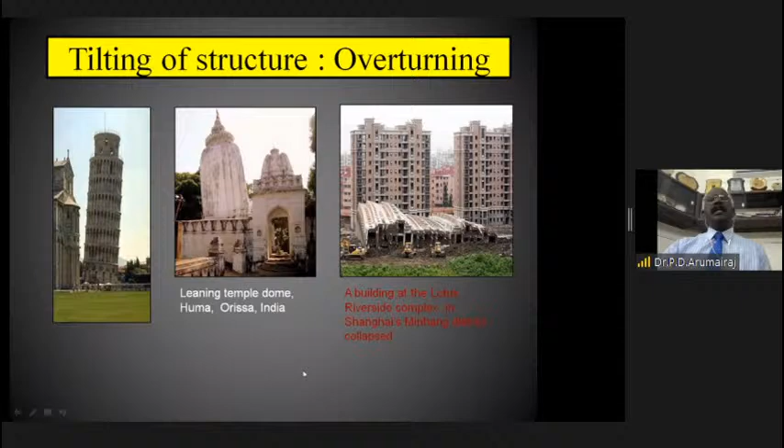So I will just have a quick passing through of these slides.

This is a new terminology you may probably come across, probably in the metro context.

Excuse me, but there have been cross talks also.

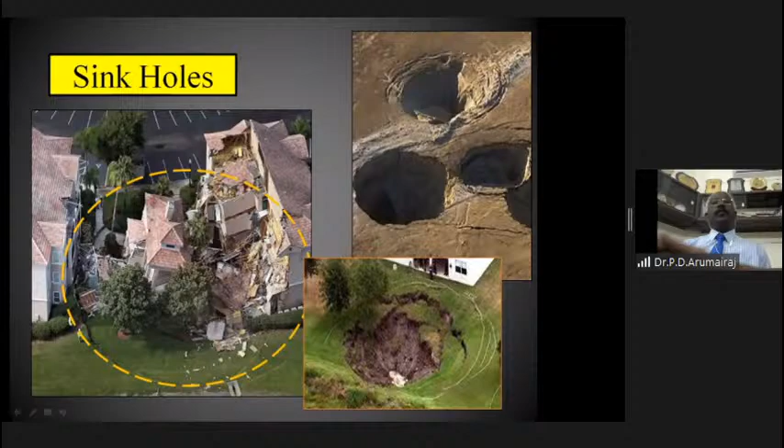So sinkholes, which were not heard of earlier, now in the nearby areas of Cochin and Chennai where metro projects are being implemented, at times we come across a sinkhole formed in the road, or a sinkhole formed along the line that was executed. So these are certain things we should know, and how these sinkholes are formed.

Next, just have a look - these are only to show you some pictures, to see why an investigation and how the evaluation of bearing capacity should help us. That is the thing. Next.

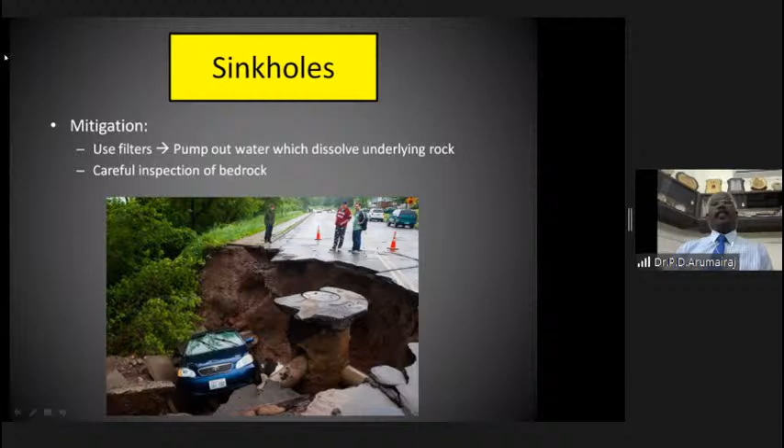These are all some failures, you know. Yes, next. Then frost heave.

When I studied these subjects as a student, I used to wonder whether we would really execute all these things, whether they were relevant to our education. But now, as a teacher, engineer, and consultant, I find that every line you study in your subject appears in the practical field. Normally we ignore or omit certain portions, but anything given in your syllabus now, in almost all universities and colleges, is recast to be field-oriented. What is needed in the field is included in the syllabus. So every student should concentrate on every part of it, and I am sure it will have application in the field as well.

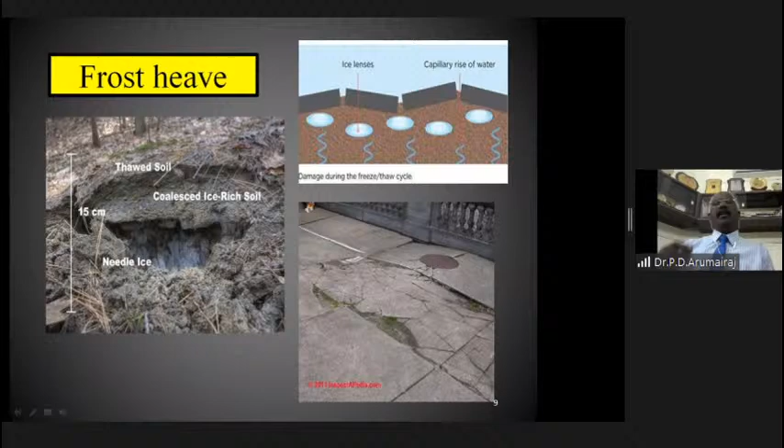Next. This is again some failures I'm showing: sand boiling, ground cracking, and ground heaving.

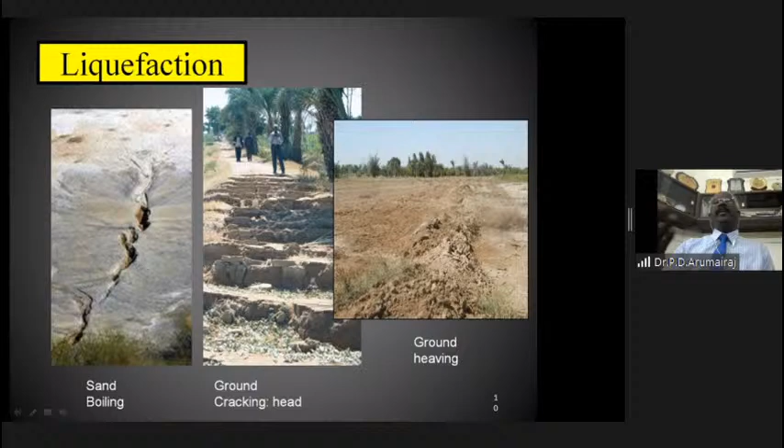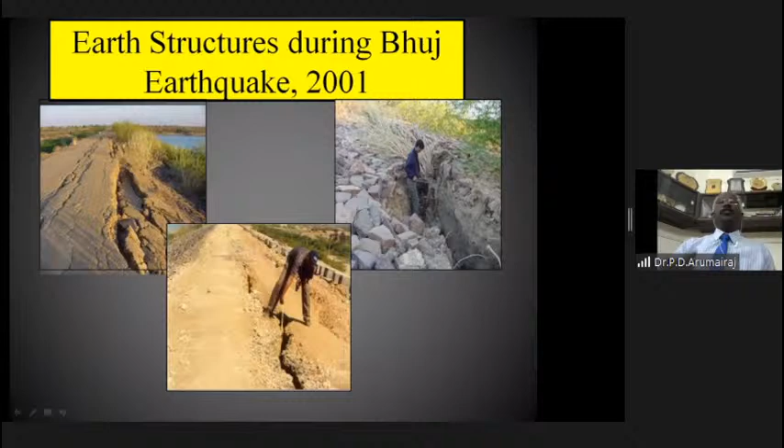And you see an overturned apartment complex. Even today we saw in the newspaper that a building had collapsed in Mumbai, and we don't know how many lives were lost. This is from the Bhuj earthquake I was referring to; in the next picture you can see a few buildings.

So I showed some of these pictures just to show that there are failures in buildings. And in fact, as a geotechnical expert, I should thank the failure of buildings. I shouldn't really say thank, but only after building failures have people started realizing the importance of geotechnical engineering and the importance of the foundation.

Here there is a small projection where you can see the load path of the building. At the roof, there may be some live load and dead load. Let's look at how the load transfer takes place. From the top, the load is transferred to the beams, the roof beams, as shown by the arrows. We take a lot of care in designing the beams too — it can be a singly reinforced beam, doubly reinforced beam, a pre-stressed concrete beam, or maybe a steel section — because it has to carry the load coming over the roof, including the roof slab.

Then the load is transferred to the columns. We are again careful in designing the columns — it should not be a long column, it should be properly reinforced, and the size should be correct. According to the codes, you cannot have a 9-inch by 9-inch column; the minimum lateral dimension should be 1 foot. We are careful in so many aspects of column design because we know it has to support the loads coming over it. Then the load is transferred to the foundation.

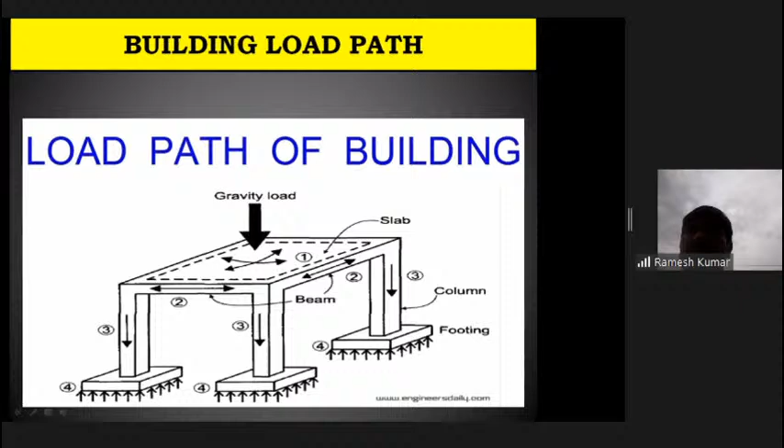I was a professor, as introduced, but during the course of my profession, I was involved in a lot of consultancy projects. Many designers used to come to us with doubts about the design of foundations.

So I used to ask them, now you have been a leading designer, designing wonderful structures. When it comes to foundations, why are you not spending time to refer and solve it yourself?

Out of interest I used to ask them, and they said, sir, soil mechanics and foundations, right from our BTech studies, was a gray area. So we thought we'll leave that gray area as it is, and we are still considering it a gray area, keeping it like that.

But I am sure, not just because I got interested in geotechnical engineering, that geotechnical engineering or soil mechanics and foundations is really an interesting field, because you are dealing with a lot of uncertainties and challenges.

See, if you want to design a building, if I'm sitting in my room and given the plan and all the details that are needed, I need not even move out of my room. I can do the design and send it.

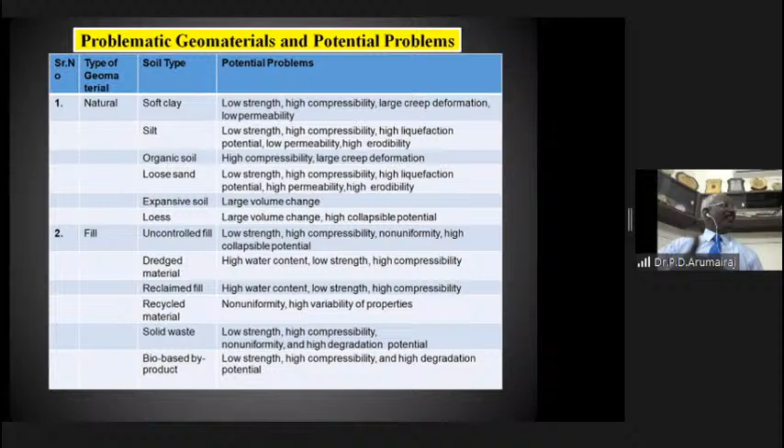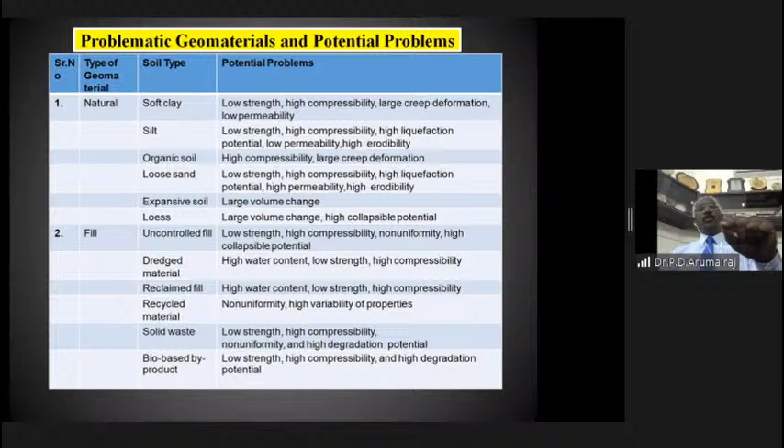So friends, I have taken so much time to give an introduction. If I spend time on the introduction, you should be able to think and develop an interest towards this subject and topic, and once you develop interest, you can understand what it is. Normally a lecture shouldn't go beyond 20 minutes, but we've already gone nearly 40 to 45 minutes. There is no other way since we have to do everything online. Why 20 minutes? Because the mind can concentrate only up to that time. Still, we are compelled to go beyond that limit, because in a webinar we must spend more time explaining these topics.

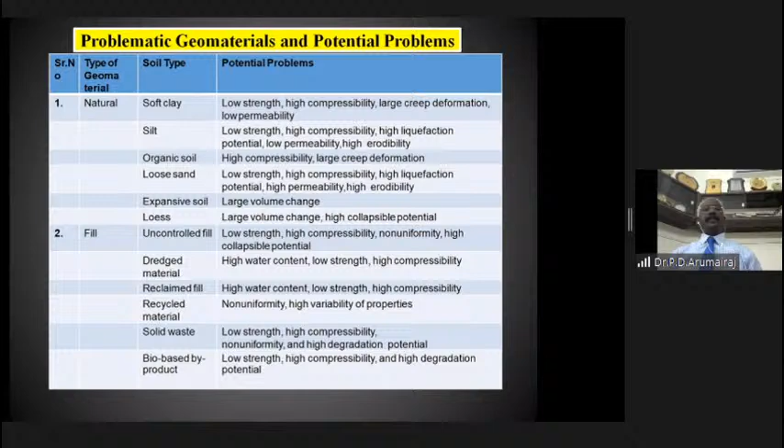Now, the first question is, what is safe bearing capacity?

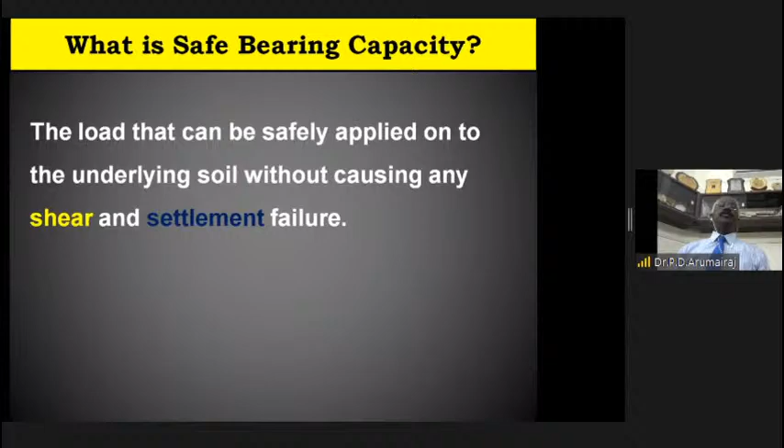So here I have highlighted two points: one is shear failure, another is settlement failure. The safe application is governed by shear failure and settlement failure. Now you may ask me, sir, what is a shear failure? We'll see that.

So what is a shear failure? You can understand what shearing is. We have seen it in stresses: tensile failure, compression failure, shear failure. You can just see shearing. So this shearing is taking place below the foundation in the soil.

There are three types. One more thing I want to stress here: in all other building materials, whether cement, concrete, tile, or brick, codes are definite, and whatever is specified can be followed 100%. Whereas in soil, codes are meant only to give guidelines. They can only guide you, telling you to do this or that. You may deviate from that, either to reduce the value or to increase it. That's why I quoted the basics.

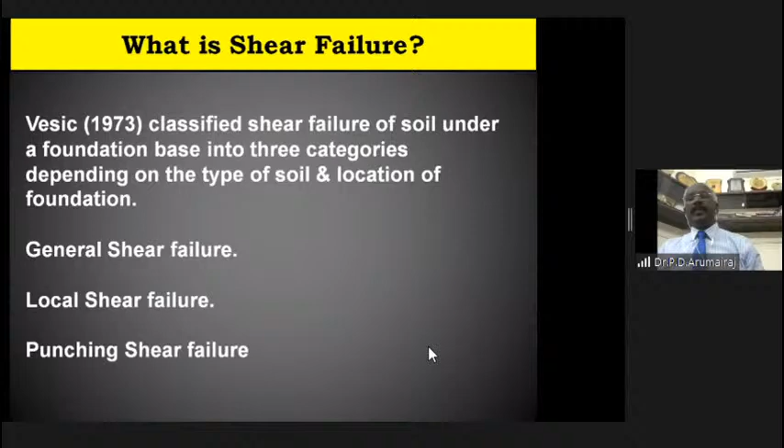General shear failure, local shear failure, and punching shear — there are three types of failures. In the definition we had given, shear and settlement, so I am just concentrating on the shear. I have put three conditions: general shear failure, local shear failure, and punching shear. What is general shear failure?

Suppose I have just put Q ultimate. That is the footing, imagine that to be the footing. Like a step, you can see it. It is for a strip footing, and it looks like that.

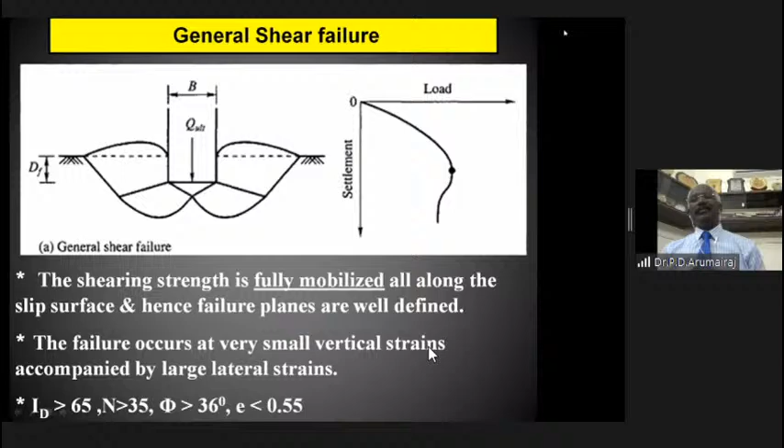Phi and C are the shear strength parameters. So we need to check what the phi value is.

We can understand if it is a soil which has got a phi value less than 30, there is a local shear failure. In what way does it help? I told you in the previous case, the shear strength is fully mobilized.

In local shear failure, only two-thirds is mobilized. By the time two-thirds is mobilized, it fails.

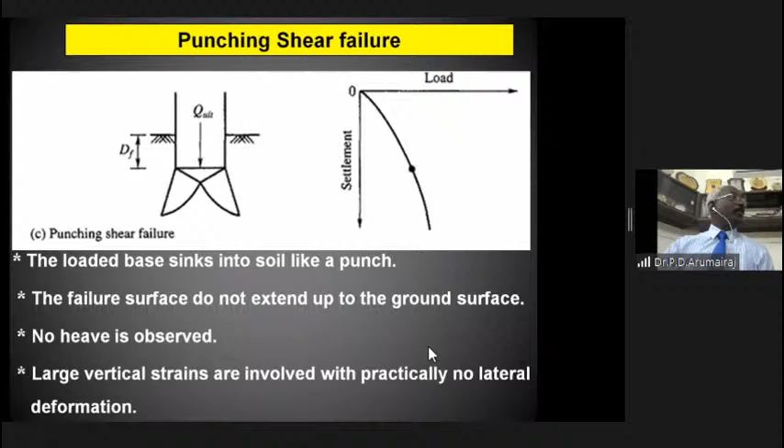Then next is our settlement. Going back to this settlement failure, highlighted in blue color - what is that settlement failure? Is it only about shear failure, or something else too? Why is settlement failure also to be considered? By definition, settlement is the downward movement of the ground caused by load displacing the soil.

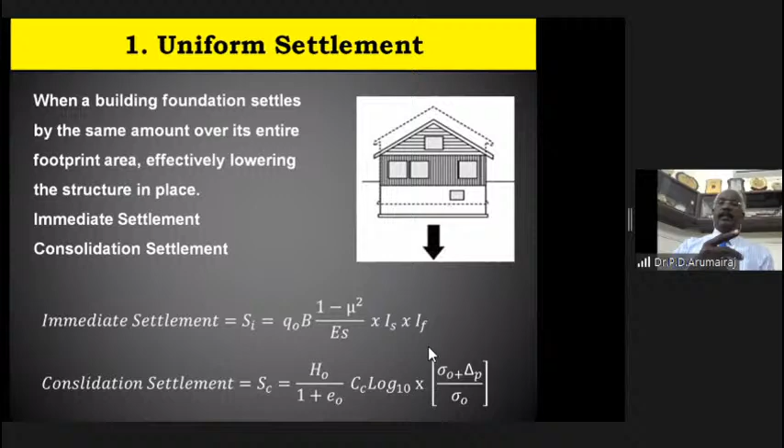So we have to calculate these two settlements separately, then add them together, and you should not exceed a particular value of settlement.

And suppose in the next slide you see immediate settlements - how do we calculate the immediate settlements?

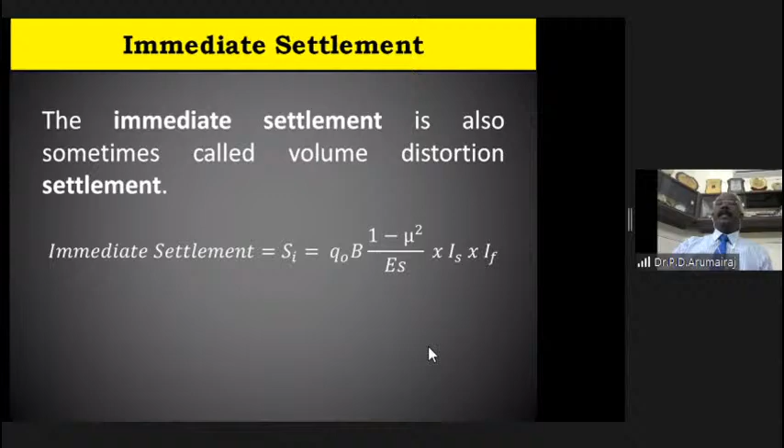So this settlement can be calculated. This is for the purpose of the students - they can see how the immediate settlement can be calculated.

The second settlement is consolidation settlement, and it is a time-dependent settlement. In the consolidation settlement, you can see S suffix C, settlement due to consolidation is equal to H naught divided by 1 plus E naught, times CC log to the base 10 of sigma 0 dash plus delta sigma divided by sigma 0.

This will occur in the case of clay soil, and this consolidation settlement will occur over a period of years. It doesn't complete today or tomorrow - every year it keeps settling.

How do we find this consolidation settlement? There is a calculation here, where E naught is your void ratio, H naught is the thickness of the sample, and we have to conduct a consolidation test in the laboratory.

Consolidation test in the laboratory - that's what I mentioned in the beginning. If testing soil for moisture content takes about 24 hours, the consolidation settlement test takes about 3 to 4 days, depending on the loading conditions. How many people actually do the consolidation test?

I do not. But in the case of clay soils, the consolidation settlement has to be determined, based on which your bearing capacity value can be given. I have just mentioned to you, we can give 30 ton per square meter, or 40 ton per square meter, or 20 ton per square meter, and it is in one way based on some arithmetic calculations, or based on some field tests.

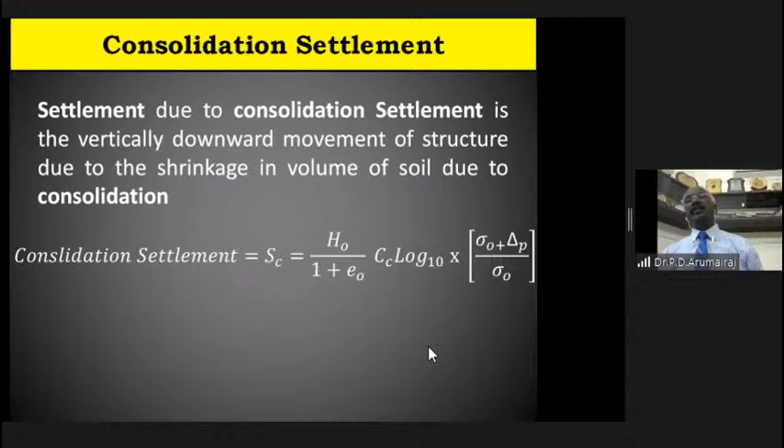But this consolidation test will give us the confidence to give the correct value of bearing capacity, safe bearing capacity. That is very, very important. Simple calculation is not correct. That arithmetical calculation combined with this consolidation settlement, particularly in the case of clay soil, is very, very important before we come to the conclusion on the clay soil.

SBC - so the consolidation settlement has two types: one is primary consolidation settlement, the other is secondary consolidation settlement.

Primary consolidation settlement can be determined from the consolidation test, whereas secondary consolidation settlement cannot be determined easily, and it occurs for 5 years, 6 years also. Normally this secondary consolidation can be ignored, so please just forget about it.

So in the case of primary consolidation settlement, what happens? For soil to settle down, the void should be reduced - that is the gap between the soil particles or soil solids, that is voids. The settlement is possible under two situations, because the voids contain two components: one is air, another one is water.

Sometimes voids are filled with air completely. Then we call that soil a dry soil. If it is a dry soil, the voids are filled with only air.

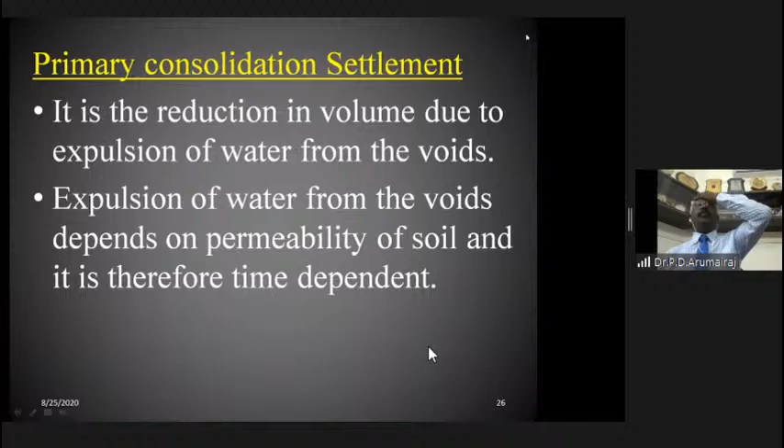Ground improvement techniques - previously I used to ask, if I want M60 grade concrete, I can immediately make it. But can we make soil of M60 grade? With the advancement in ground improvement techniques, we can say it is possible. The existing ground, existing soil, can be improved upon by these techniques, even to take care of 60 tons per square meter.

So please remember, I concentrated on two factors: one is shear, another one is settlement. That is why I have gone deep into these two aspects, because we should know how the bearing capacity is calculated, how it is evaluated.

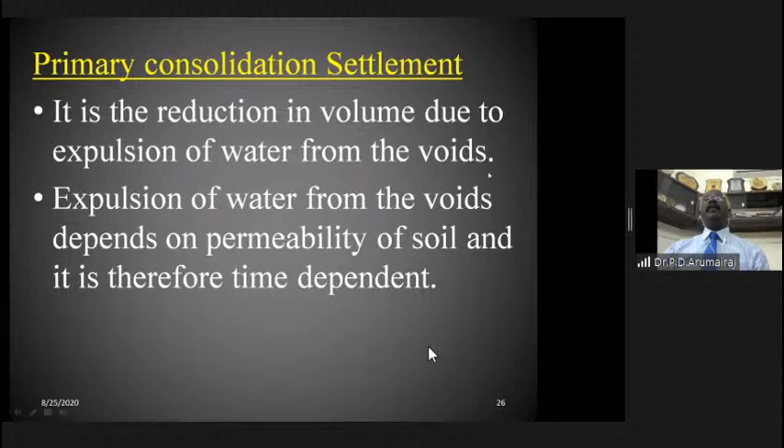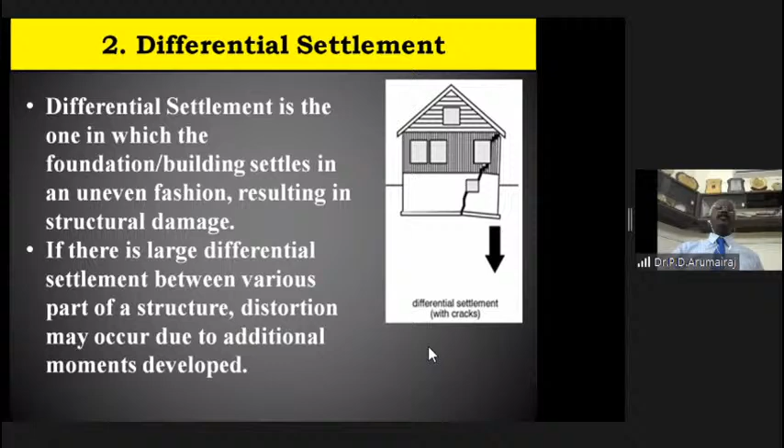Every structure is designed for a limiting settlement, a tolerable settlement. For an isolated footing on sand, the tolerable settlement is 25 millimeters. For the same isolated footing on clay soil, it is 40 millimeters. If it is a combined footing, the permissible settlement on sand is 40 millimeters, same on clay it is 65 millimeters. And if it is a raft foundation, on sand it will be 65 millimeters, on clay 100 millimeters.

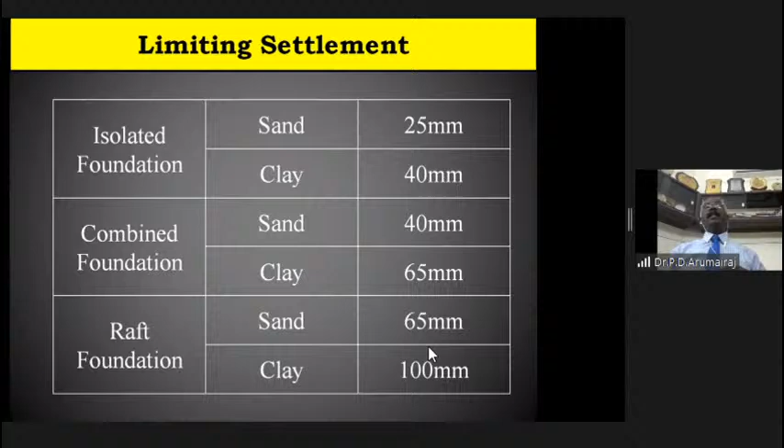So we design the building, we evaluate the bearing capacity, taking these values into consideration - for raft we have a permissible settlement of so much, for isolated footing we have a permissible settlement of so much. And if you exceed this uniform settlement, that may lead to differential settlement in buildings. That is what we need to remember.

So these are all some of the things - uniform settlement, building tipping settlement, differential settlement, every crack goes for this. See how walls are cracked, there are a lot of projections.

So for the bearing capacity, I have a definition where two aspects are stressed: one is the shear failure, another one is the settlement failure. So that you need to remember.

Your bearing capacity - in the field there are methods: standard penetration test, dynamic cone penetration test, plate load test. And there are analytical methods. There are many more methods also available, but I am not bringing them here because I want to keep it at the preliminary level and not go beyond that at this stage.

Standard penetration test is very common and it is universally accepted all over the world. The output of the standard penetration test is simply denoted as capital N, the SPT N value. In the country, if the N value of the soil is known, people can easily understand the property and condition of the soil. So next one is the dynamic cone penetration test.

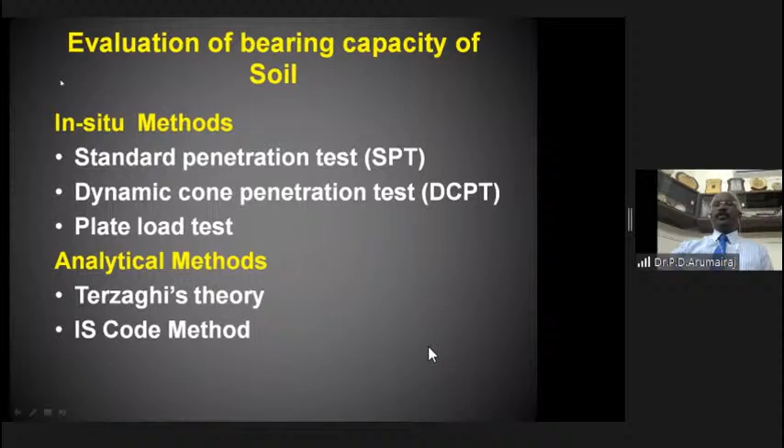So in the standard penetration test, brother, we just make a pit. This is a simple test, and probably the cost for this test is considered to be minimum, that's what I can say. Depending on the situation, if it is a small building and if you thoroughly know about the substratum of soil, we can go for the standard penetration test, for which we make a pit.

Normally, we make a pit of 1.5 meter by 1.5 meter up to the desired level of foundation, whatever level we think the foundation should be placed at, we can dig up to that level.

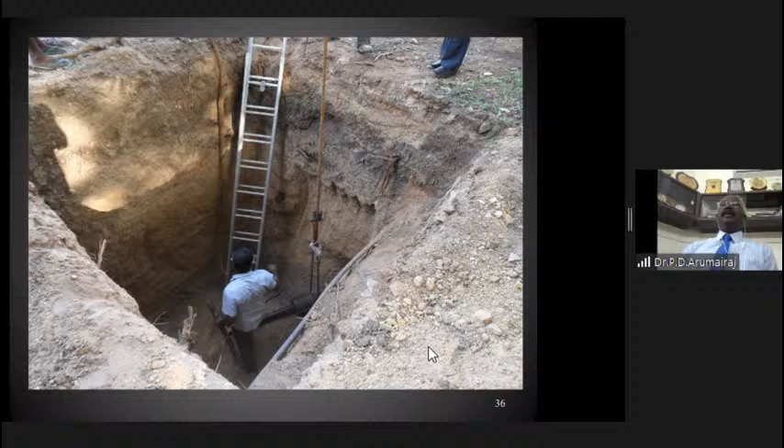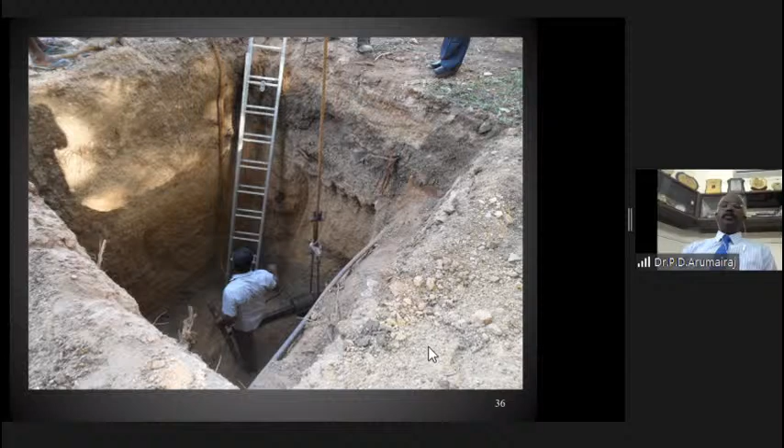There is a standard sampler as specified in the IS code, and even the British code has the same dimensions, and so does the American code. That is why the N value is standard throughout. That's why I told you.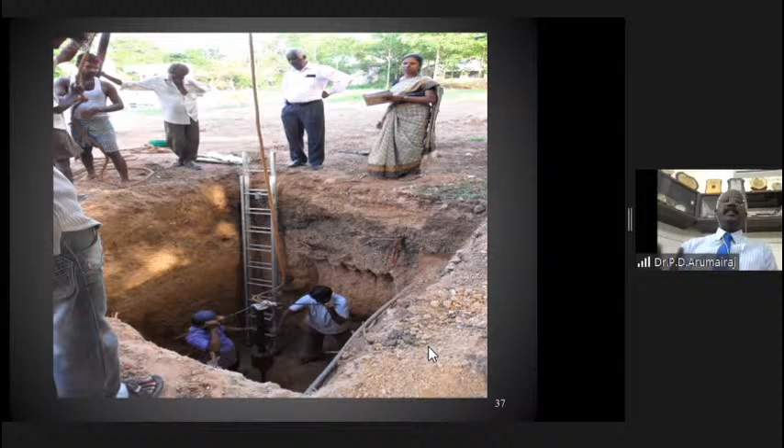Now you see here how the test is conducted. Just to see the test setup: at the bottom, the larger diameter is your weight. Through this pulley and rope, this weight will be lifted, and all of a sudden, it will be dropped.

You should not slowly drop it, you should withdraw your hand suddenly, so it will be dropped. It will apply a blow onto the head, and the head will drive the split spoon sampler. I am yet to show you the split spoon sampler.

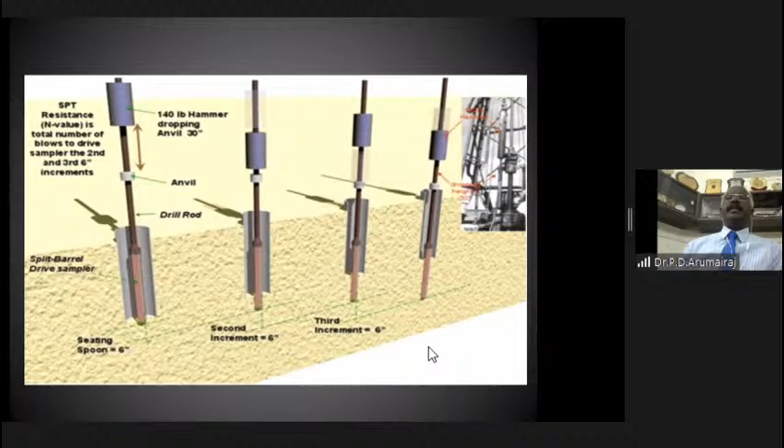We observe the number of blows needed for the penetration of the sampler for 15 centimeters, the 6 inches, that is 15 centimeters. Similarly, for 3 such 15-centimeter intervals, the number of blows required for each 15 centimeters is recorded three times: first 15, second 15, third 15. We consider the first 15 as a seating drive.

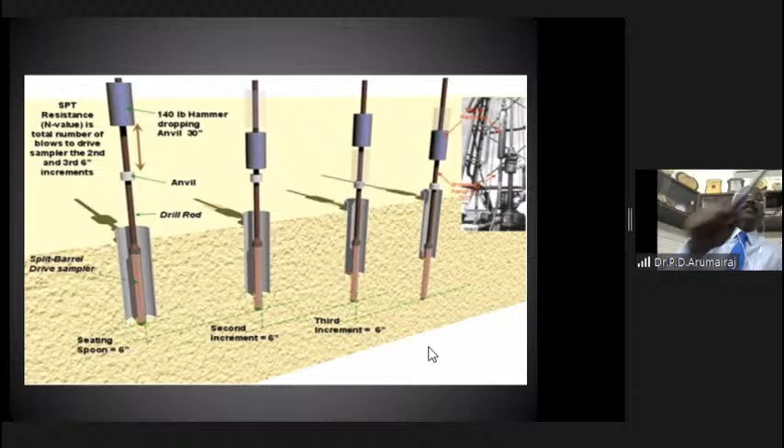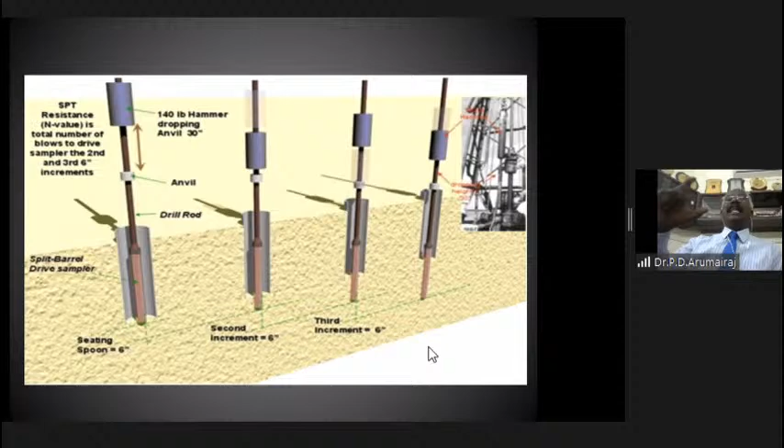Normally we excavate the pit, and it may be open to atmospheric conditions and weathering, so initially it is called a seating drive. So when that is the seating drive, what is the N value, the SPT N value? The SPT N value is nothing but the number of blows required for the penetration of the last two 15-centimeter intervals.

First 15 centimeter seating drive, ignore these blows. For second, it is 10. For the third, it is 22. Now the N value is 32. And this is an observed N value.

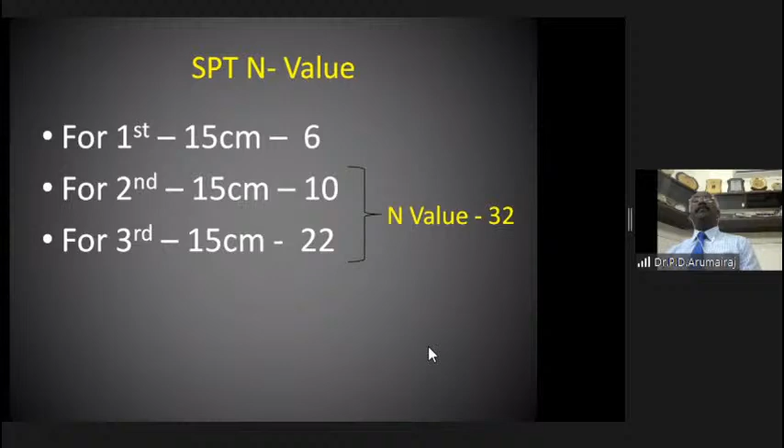And for this N value, there are corrections in the field. The first correction is dilatancy correction. Dilatancy correction will be applied when we conduct the test in a saturated silty sand. See, every terminology has a meaning.

Saturated - just now I told you what is meant by saturated. All voids are filled with water. So when it is saturated, the water present in the voids is called pore water. This pore water will offer some resistance to the penetration of the blows, so there will be an apparent increase in the number of blows.

So the number of blows observed is more than the actual blows needed, because of the saturation of the soil. So when it exceeds, the observed N value is greater than 15. In our case, the observed N value is 32. Now it is greater than 15. Now I have to apply a dilatancy correction.

What is the dilatancy correction? 15 plus 0.5 into N dash minus 15. We had observed it as 32. So 15 plus 0.5 into 32 minus 15.

So 32 minus 15 is 17. Half of 17 is 8.5, or you can take it as 8. So 15 plus 8 is 23. This 23 is the corrected SPT N value. Observed SPT N value is 32, that is now corrected to 23. Just imagine.

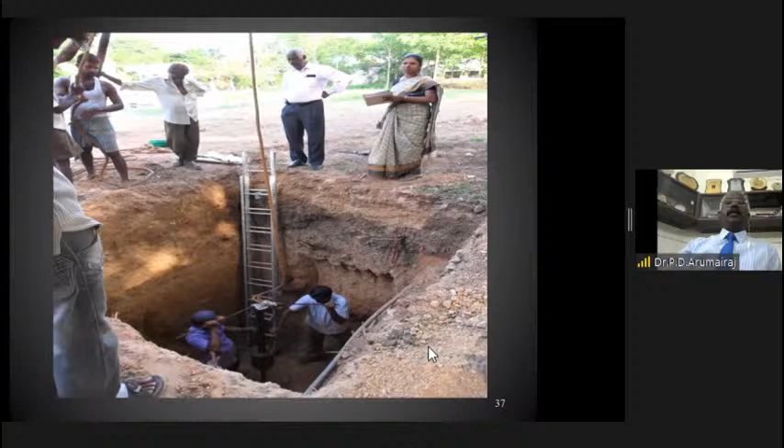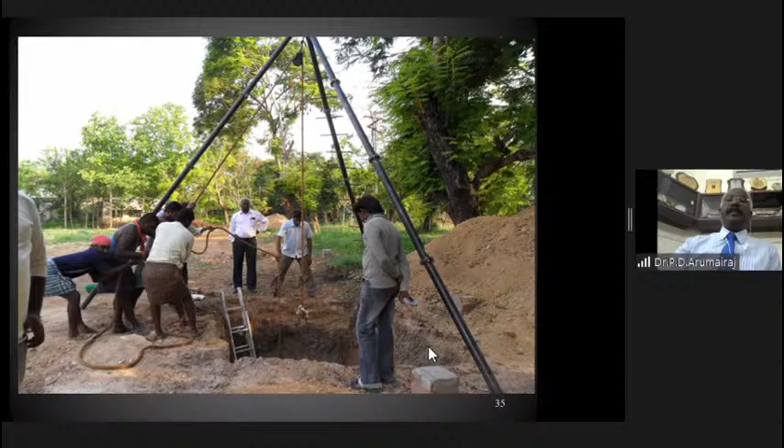What is an overburden correction? Just if you go to that pit - see, we conduct this test in a pit, the open pit. So before the pit was excavated - just imagine, this is the pit - we removed the overburden above the bottom of the pit.

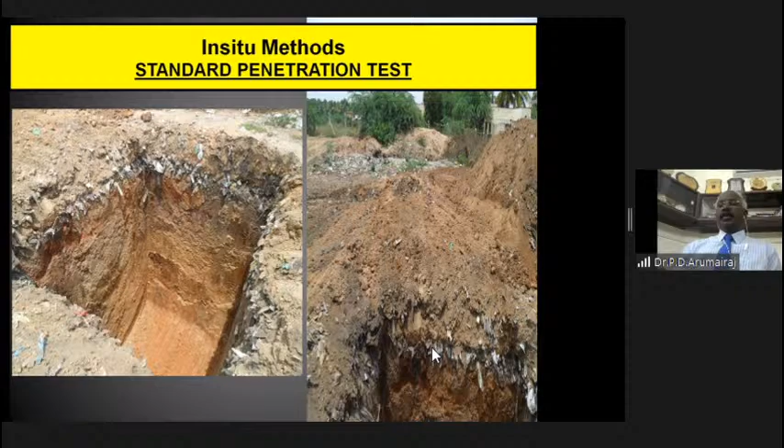As a result, now this split spoon sampler can easily penetrate into the soil, or the penetration value is underestimated. We don't remove the soil anywhere. If you now drive the split spoon sampler without removing any soil, there will be an overburden pressure. That surcharge will make the bottom of the pit still compact, and the split spoon sampler will not go easily. Since the surcharge or overburden is removed, we apply the overburden correction.

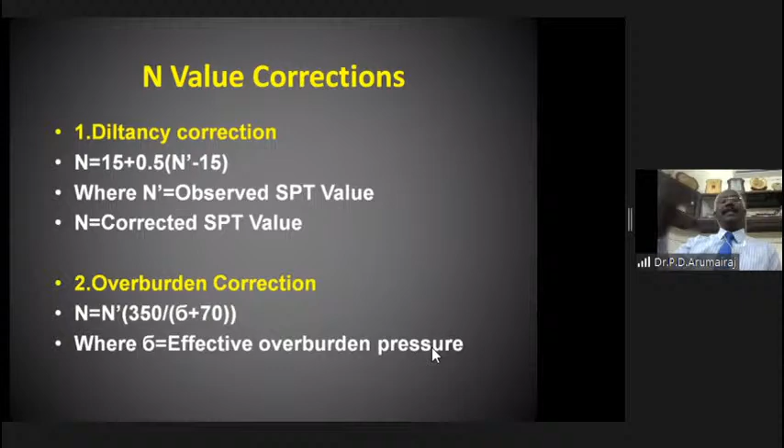So after this correction is also applied, here N dash is the observed N value, 350 divided by sigma dash - sigma dash is nothing but the effective overburden pressure. So effective overburden pressure is sigma equals gamma into H, that's all. What is gamma? Gamma is nothing but the unit weight of the soil, multiplied by the height, giving you the overburden pressure.

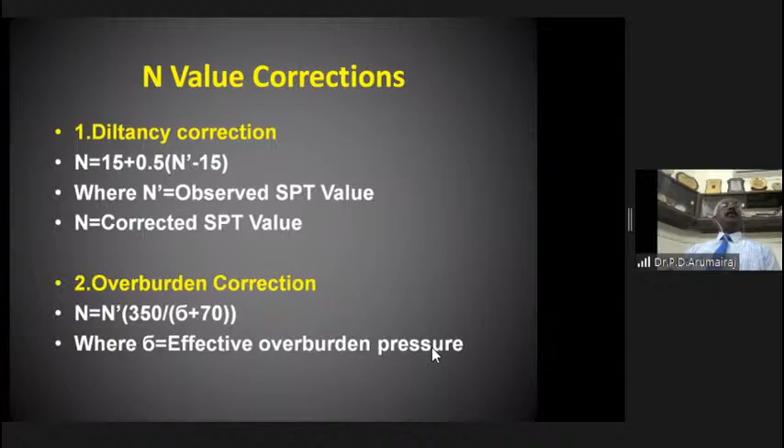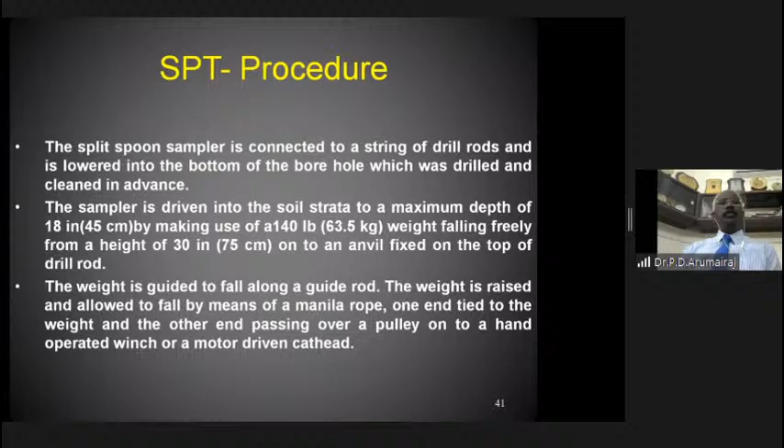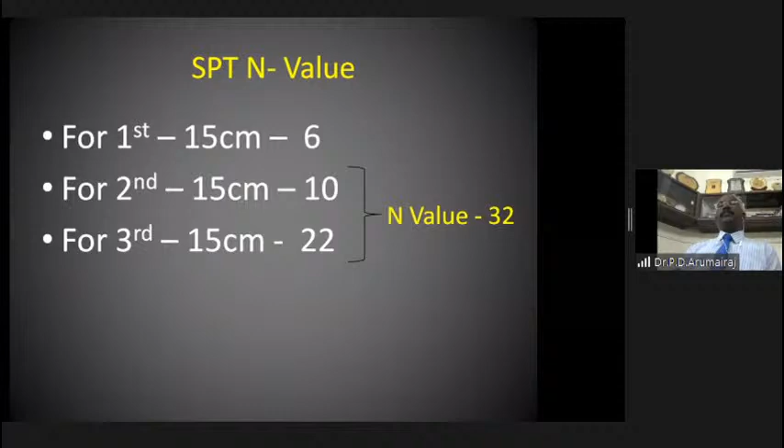So this is a very handy test. If you just want to read the procedure, you can go through that later also, because it's available in the code, it is available in the book, and this is the procedure, how it is done. So now I told you this is universally accepted because the weight is the same, height of fall is the same - the energy applied on the split spoon sampler is the same, and the dimensions of the split spoon sampler are the same. So naturally everyone has to accept it is standardized.

Now once the N value is corrected, from this N value only we calculate the bearing capacity of the soil. I told you the bearing capacity is based on two factors - one is the shear failure, another is the settlement failure. So there are two formulas available here, one based on shear failure, another based on the settlement consideration.

So this is only an arithmetic formula. You see here, N is the corrected N value, B is the breadth of the foundation, RW2 is the water table correction, and N is again the N value, DF is the depth of foundation, and RW1 is the water table correction. So what is this water table correction?

In a sandy soil, the presence of water or the water table rises up to the foundation level - the water table rises up to the ground level. The bearing capacity will be reduced by 50%. The soil is capable of having a bearing capacity of 500 kilonewton per square meter. It is reduced by 50%, so actual capability is only 250 kilonewton per square meter. So the water table correction has to be applied in all cases, because when we construct it may be dry, but when it will be saturated we do not know.

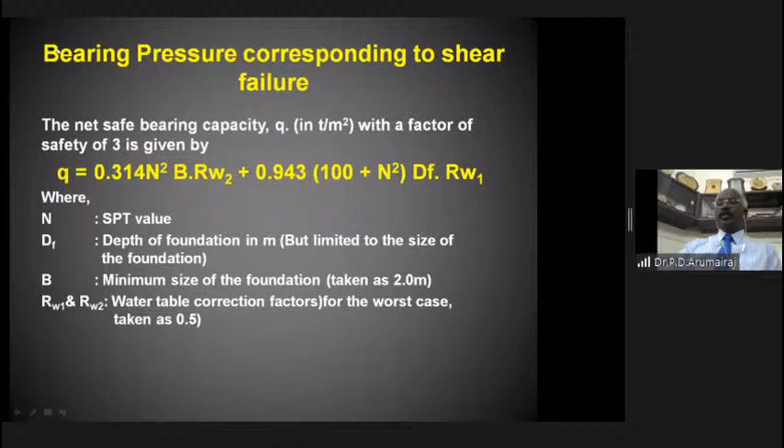This everyone should remember. Many people used to ask immediately after the test is over, so what is the SBC that we can adopt? If it is a gravelly soil, I can straight away tell sometimes. If it is a clay soil, a fine soil, it's not easy to say.

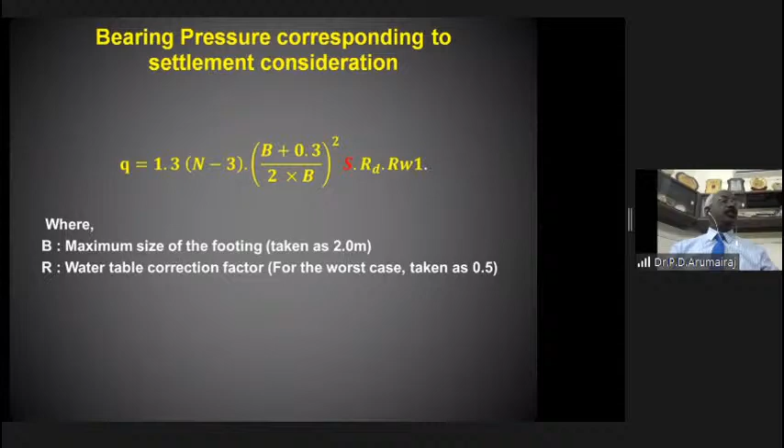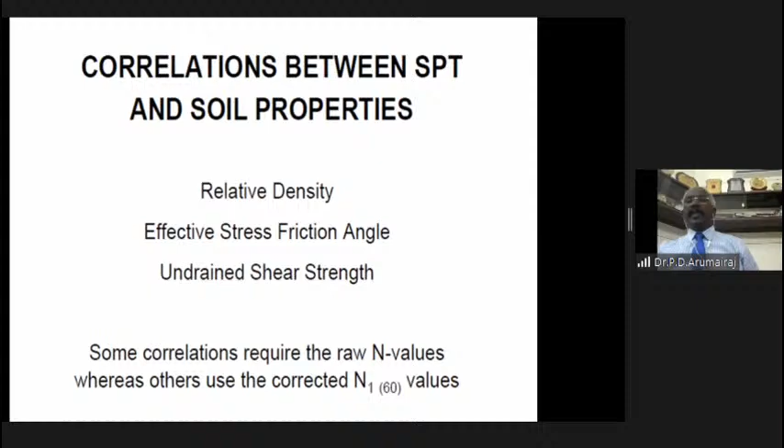As I told you, we have to conduct the consolidation test also. So this is one. Probably we are running out of time, I just see. Once the SPT is there, this gives an idea about the various parameters of the soil also. This is after conducting extensive experiments.

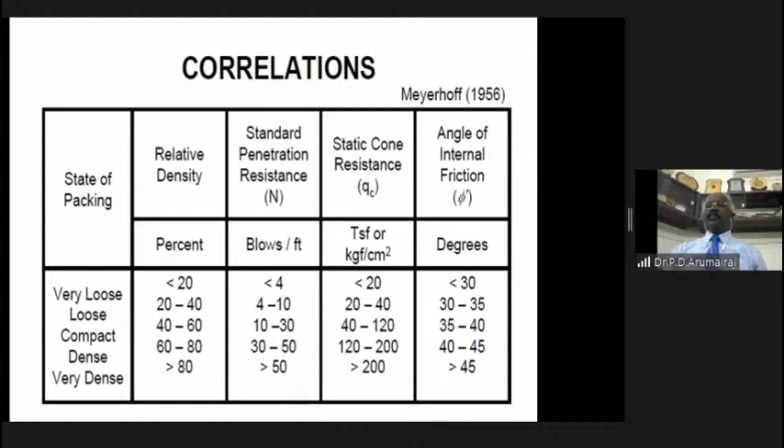This is given by Meyerhoff. So for N value, we can classify what is the state of packing. I just quickly go to the another test which is called the dynamic cone penetration test.

The test procedure is the same, the test setup is the same, but the only thing at the bottom of it you can see there is a cone. Instead of the split spoon sampler that I had shown earlier, this is a cone here. This cone will facilitate piercing into the gravelly soil.

That is important. There we calculated the penetration for every 15 centimeter. Here we are going to calculate it for every 10 centimeter, 10 centimeter, 10 centimeter.

Another advantage of this is that in the split spoon sampler there is a hollow portion at the middle. Soil will get into the split spoon sampler and at 45 centimeter it is finished. Then you have to remove it, then you conduct another test.

But here, the DCPT test can be conducted continuously for any depth. You need not remove it and conduct it. You can continuously observe, and that will give you an idea what the penetration resistance is across a particular depth.

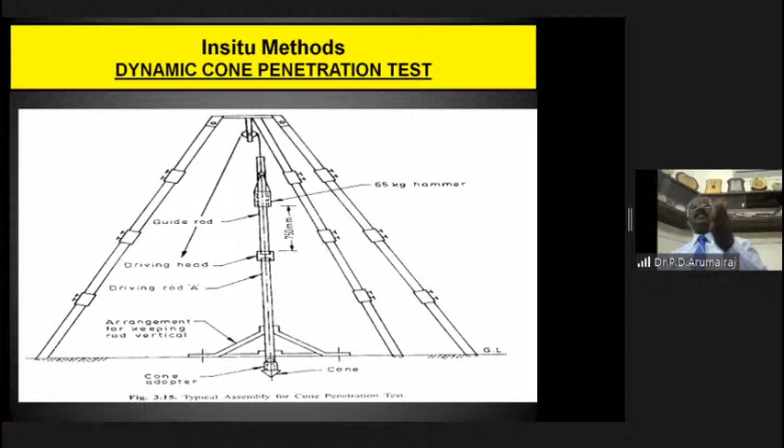Probably you can see it. Of course, this is the cone. This cone is also standardized, a dynamic cone. This is also a universally accepted one.

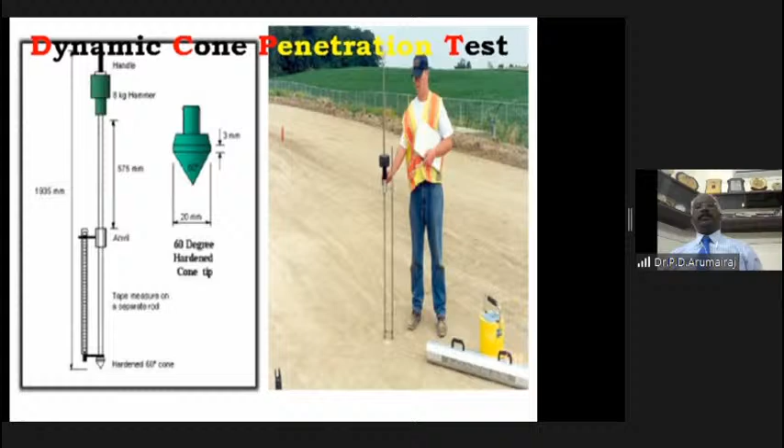Can we take this as the depth of foundation? Can we take this value for the safe bearing capacity? No, because there is another criteria: to what depth will this influence of the load be there?

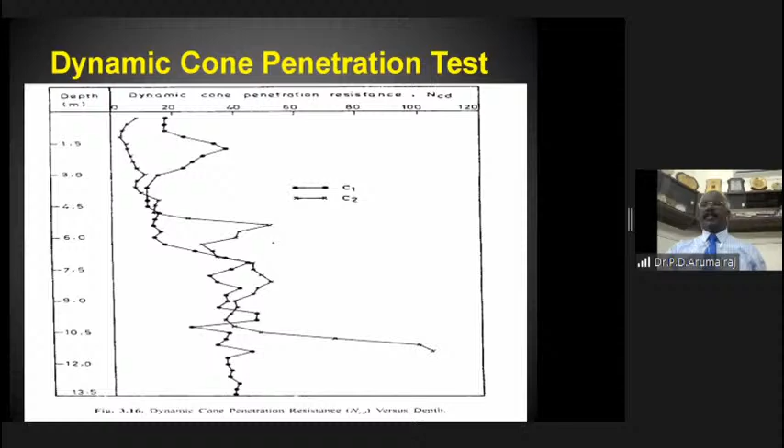What depth the influence will be there. If it goes like this, even a straight line, I can choose this value. Even if it doesn't increase, but goes like this, I can still choose, but it is declining. For every foundation, the influence will be there for about 1.5 times or even 2 times the breadth of the foundation. If the width of the foundation is 2 meters, below the base of the footing, another 3 to 4 meters, I have to see the same soil continues, the same stiffness of the soil continues. If it is not there, then the failure will take place. So this gives a clear history about it. So this also we have been doing.

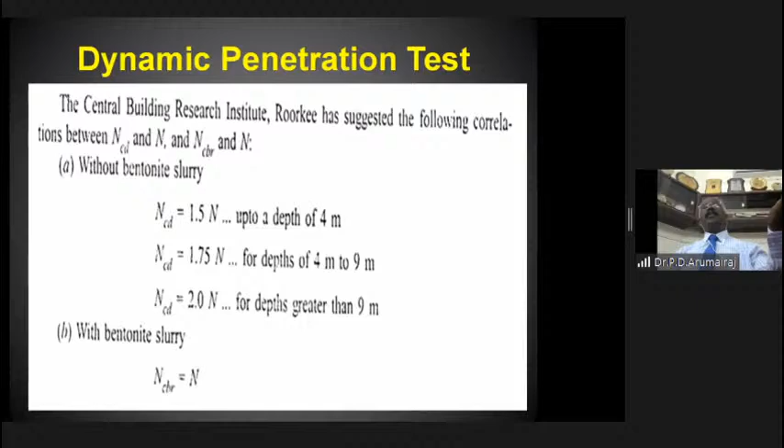And dynamic, there is a correlation between the cone resistance and the N value. Now the N value can be obtained from the cone resistance value. And this obtained N value can be substituted in the arithmetic formula, which we show for the calculation of the bearing capacity of the soil.

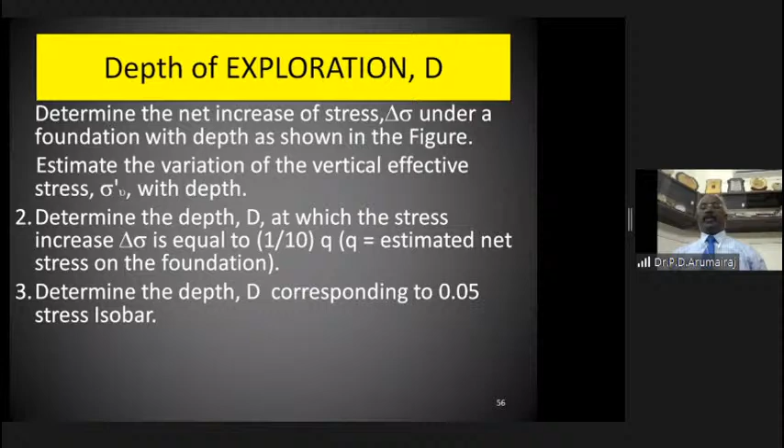So this is what depth of exploration. See here, if this is the base of the footing, there are 3 conditions for that. 1, 2, 3. But instead of understanding all these 3, we simply say 1.5 times or even 2 times from the base of the footing. Why do I say even 2 times? In the code, some values are given, but we can never take it as final, because if one suspects that it has to be checked even below that, it has to be checked. Because the codal provision is only a guideline. It's not a final guideline. So that is why I said 1.5 to 2 times. And it is not confident.

Just see here, 1.5 times B from the rafts. Suppose you provide a raft, entire width maybe about 10 meters, 20 meters, then what should you do? You should explore up to 20 meters. Are we doing that? Are we doing that?

And spacing of the borehole. There is a number of boreholes needed.

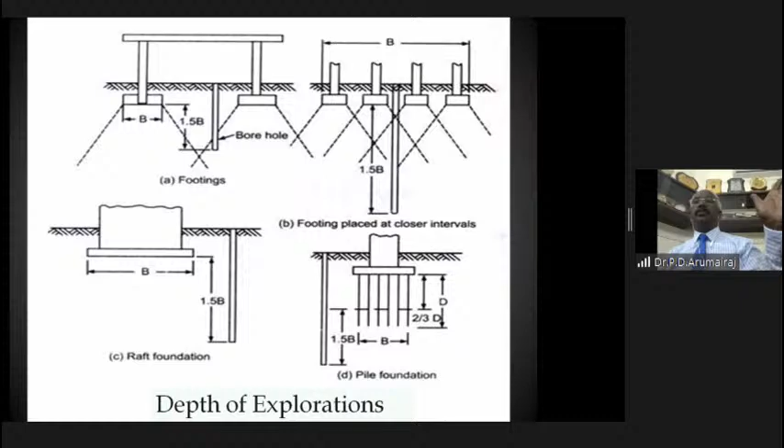Suppose you take a blood test, can you go to any experienced doctor and ask him straight away, sir, this is my blood, can you tell me which group it belongs to? Can anybody say? Test, we tested. And doctor says this blood test is not sufficient, go for a scan. Do you think that he is telling it for a joke? He is not convinced, he is not able to come to a conclusion from the blood test. He wants a scan so that he will be able to find out. Why do you go for a second opinion? Why do you go to an experienced doctor so that he can easily identify?

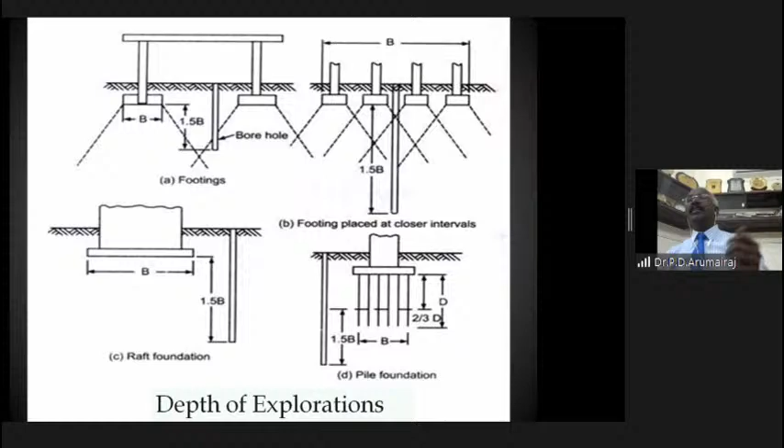Many times you have come across an X-ray. Suppose it is projected before you and me, it looks like a figure. But for an experienced doctor, where is the problem? He can pinpoint that. How many doctors have missed the small dots that are seen in the scan report and the X-ray reports? So exposure and experience is very much important.

So depth of exploration is one factor. And lateral extent also. Suppose this is the base of the footing, and lateral side also. I got a beautiful example for this, but we are running out of time.

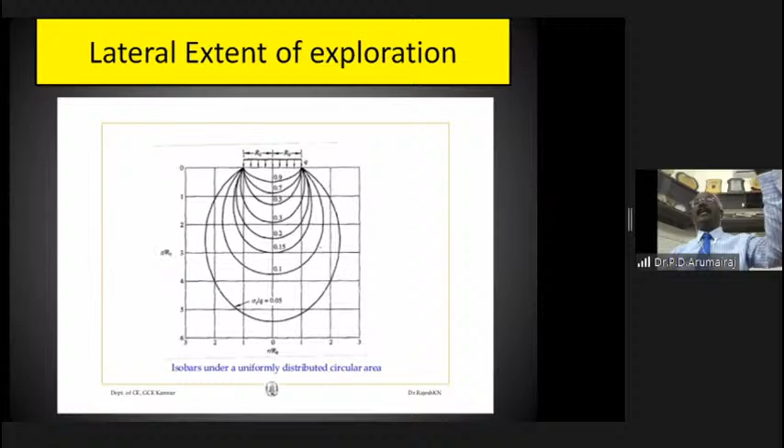Now, I talked about you should go for 10 meter, 15 meter. Now, borehole investigation is handy. Borehole investigation is one. The same SPT is conducted at every 1 meter or at every 1.5 meter.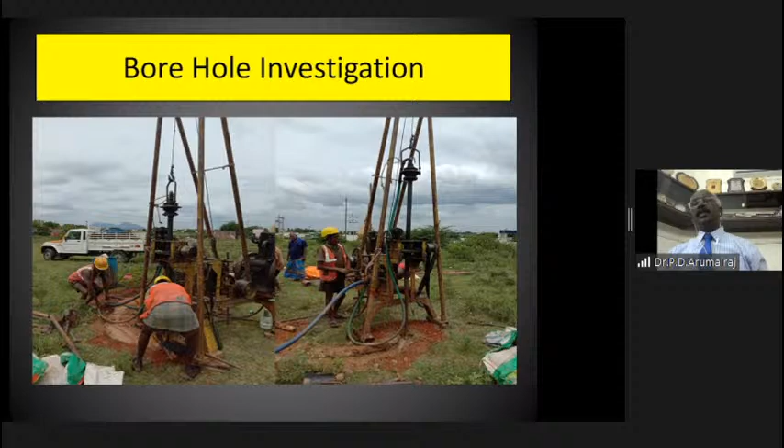We collect soil samples and take core samples also. These are the core samples obtained in our investigations. A 1 meter core, only this much sample indicates something. Sometimes, like recently yesterday, we got from a place a full 1 meter core, rock, intact. It's quite interesting, students, please see that.

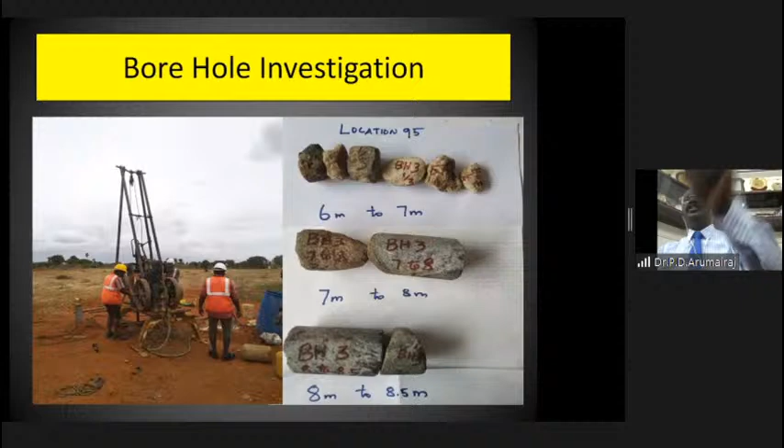We cannot pre-conclude any formation of the soil. It is quite interesting, it differs from place to place. And these are some recovery samples. You need to have an idea about the geology also, what type of rock it is. You must be able to have some idea about it.

And this is a bore log that we take. See here, we have gone up to 10 meters for a particular project. This is probably for our...

In Valankulam pedestrian bridge, now they are under the smart city project, the projects are going on. There is a pedestrian bridge where we have designed that building, designed that bridge, and we have done the soil investigation for that also. This is the profile you can see here.

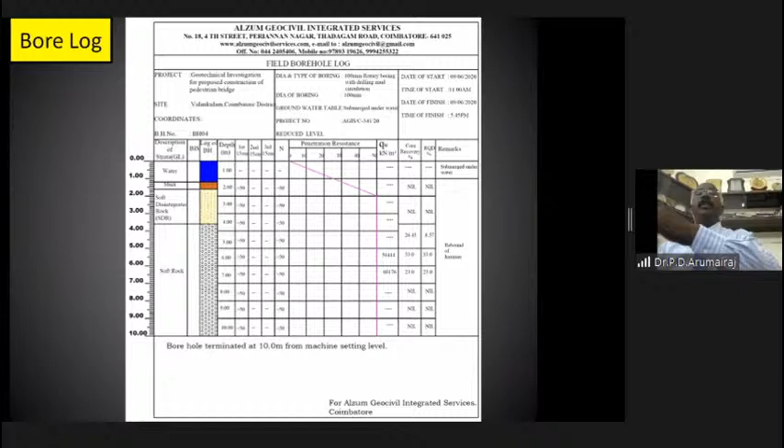Water, it is being done underwater. Even students who are interested, you can go and see at least for 2-3 days. The investigation is an offshore investigation done on a boat. You can see, underwater we are doing the investigation in Valankulam.

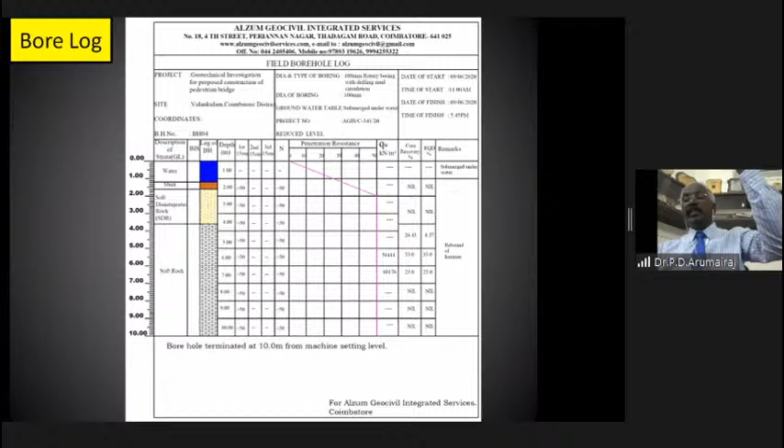Just see here, water, muck, soft, it is a soft rock. So we can go up to 10 meters. I told you I have gone even up to 100 meters in the Singapore sea. Just imagine, and how we classify the soil, how the penetration resistance works.

Before I close, I can tell you about the plate load test also. This is what I just told, in all infrastructure projects a plate load test is being conducted. There is a plate here, there is a jack, and this is the truss that is anchored to the ground. When you operate the jack, it will try to lift the truss.

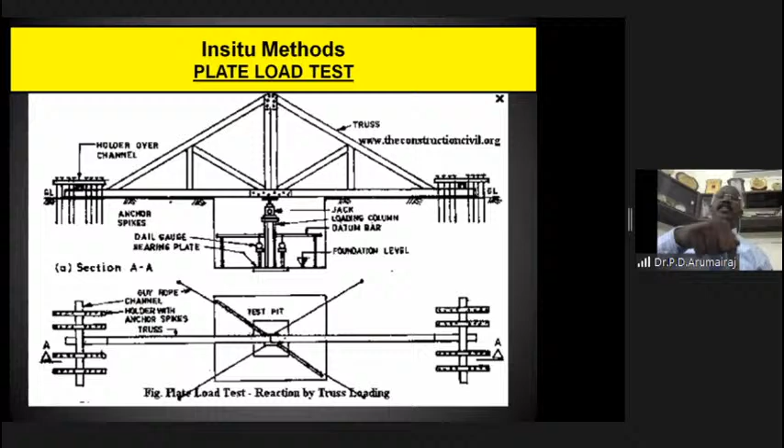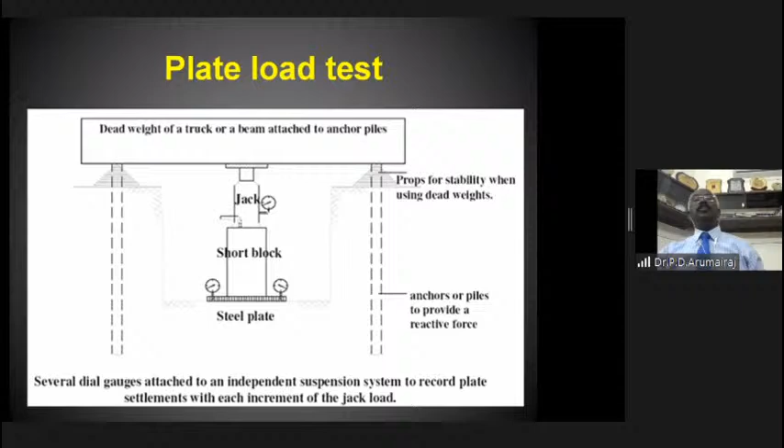As a result, the reaction load will be transferred towards the plate. You can just see here, I just projected it, it's available in the book. I normally used to spend time on the examples, but so how do we calculate? Again here also the settlement is a factor.

See here, this is the load settlement curve. Why settlement? Because the settlement has to be limited. This axis is load, ultimate load bearing capacity. How do we take it? This is the shear failure. This is an indication for a general shear, this is an indication for a local shear failure, and this is an indication for a punching shear failure.

Just imagine how we take that ultimate bearing capacity, and how we take the safe bearing capacity from the ultimate bearing capacity. Ultimate bearing capacity divided by a factor of safety is the safe bearing capacity.

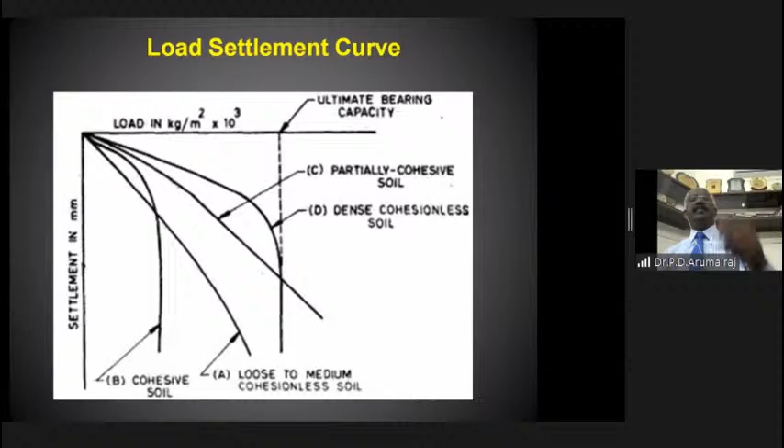So this is what probably analytical methods refer to. Analytical methods, Terzaghi's theory is the main thing. The simple equation is Q ultimate equals C times Nc plus Q times Nq, where Q is nothing but gamma into Df, plus 0.5 gamma B N gamma. This is of academic interest.

Though I am basically an academician, I am a practicing engineer as well, and these theoretical calculations don't hold good at all when you go for a field test. These theoretical projections will always give only the conservative values, because we'll be collecting soil samples, conducting tests for C and phi, and those values will be inserted here. Collection of sample disturbance will be enormous. So I don't believe in this calculation unless we are not able to physically reach the site.

See, a sample from the moon is collected and tested here for the shear strength. We cannot go to the moon, we cannot conduct an SPT test, we cannot conduct a borehole test. So we collected the sample, we determined in the laboratory C and phi, and we arrived at what is the shear strength.

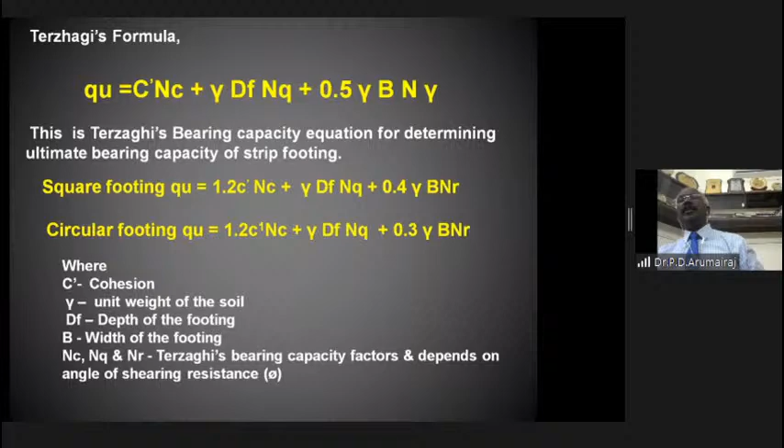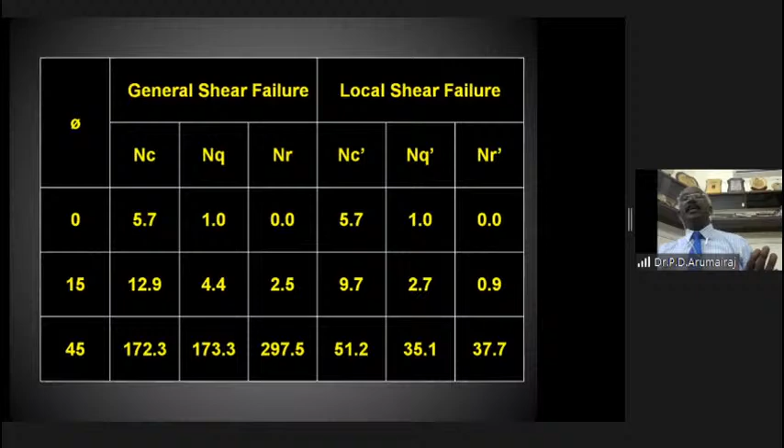If you are really able to go to the place, you can go in for the field test, which is expensive and costly, but also reliable. Don't be afraid of the cost. I can tell every engineer or every student, that cost can be very much saved in the design.

So only 3 components: CNC plus QNQ plus 0.5 B gamma N gamma. It is available in all soil mechanics books. But my conclusion is this value obtained from here is very conservative. For places you cannot reach, you can still rely on this method.

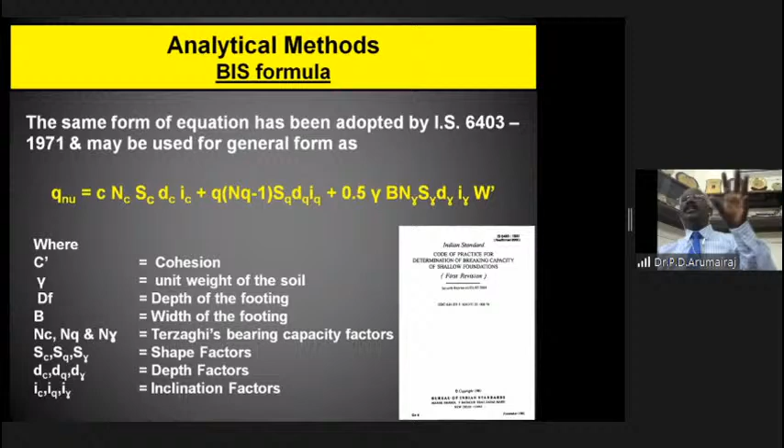But as an expert, or as an engineer, or as a consultant, as a practical person, you should consider all these factors in mind before recommending your final factor of safety value.

So probably I have just finished. I have taken a lot of time, dragged almost up to 8 o'clock. I don't have time, I have got a lot open. I have a lot of examples also. Quickly let me tell one example.

Probably I can. Thank you. I just share one example.

One of the leading personalities in Coimbatore, residing in Ramanathapuram, is a film personality. He has an existing building, a bungalow type, with all interiors finished with wooden carvings and other things. And he was repairing his house almost every day.

Almost every year he was repairing, because he will repair, there will be a crack. Repair this year, there will be crack. After 5 to 6 years, he came to me. He asked me, it is cracking even after repairing the building every year.

I asked him to provide 2 trial pits up to the foundation, one at the front and another at the back, diagonally opposite each other. After a lot of reluctance, he went. Then he said, I have made the pit. I went there to see, he had made only 1 pit.

I inspected that pit. I could not find any reason for the cracking. I again requested him, sir, make 1 more pit. Let me complete, because I'm interested in giving solutions.